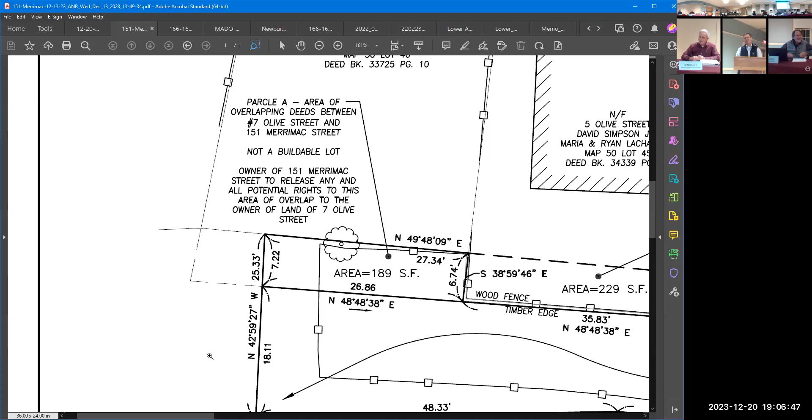Potentially, but that is a different owner. Most likely the owners, it'll never come up. So probably you'll never see it. No, it could be another overlapping piece. Yes, it is another overlap in the deed descriptions, so, yeah.

And then the other question I have is, when you're looking at the building on 151 Merrimac, the hatching doesn't go all the way around the building. Is there a reason for that, or you just ran out of ink, or?

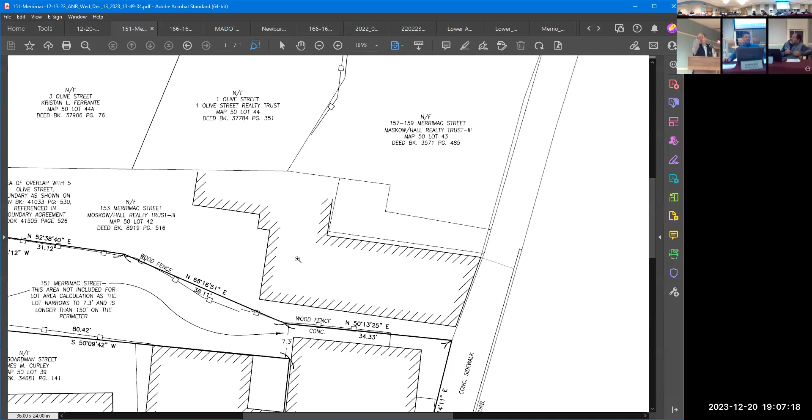The hatch, am I missing? Oh, this one, right there. Oh, that's the abutting building. That's not 151 Merrimac. 151 Merrimac Street is the corner lot. Oh yes, okay, I see.

So it's a very confusing plan, there's a lot going on. There was even more going on as we tried to pull it all together to make it legible. We typically show only 2 properties when there's a portion being swapped between one property and another. In a situation like this, it's usually pretty straightforward and you can see more clearly. Yeah, this one has a weird piece that goes to the back, and that's where it happens, and then you have these zigzags between the discrepancies, so it makes it that much more confusing. Yeah, which is why I came to help explain.

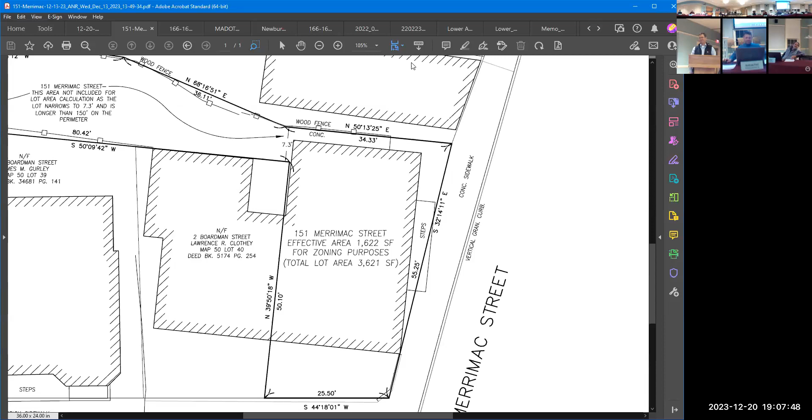I wouldn't have asked the questions if you weren't here, so.

Okay, is there a motion from the board? I'll move to endorse the ANR plan for 151 Merrimac. Is there a second? Second. Okay, all those in favor? Aye. Any opposed? All set, thank you very much.

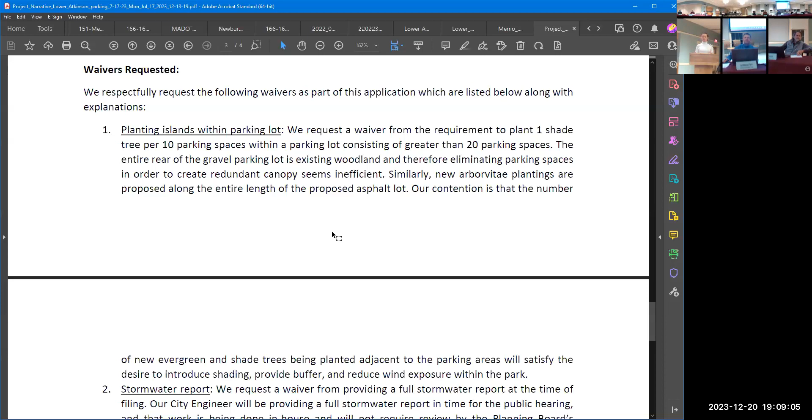So the 5 waiver requests are: number 1, a stormwater report. We request a waiver from providing a full stormwater report. The reason being that it's the city engineer who's actually working on the stormwater plan for this and would also be the one doing the consulting. We wouldn't be hiring an outside consultant, he'd be consulting the same project. We'll get into details about the stormwater management plan he's provided. We have Diane Gagnon from the city here who worked on the design as well. In a nutshell, we're providing 15 times more stormwater holding capacity than previously exists on the site. He feels confident that any stormwater overages will be dealt with on site.

The second waiver is for a traffic study. We've been speaking with our DPS director about this, and his contention is that we're not actually increasing the traffic volume to the site by doing this work. It's strictly a project to improve traffic safety by eliminating cars from backing out onto Merrimac Street. There's no aspect of the plan you're seeing tonight that's going to increase the volume of traffic to the park.

The third waiver is for the surface and groundwater report. We do include some narrative or information about that, but we are asking for a waiver from doing an actual surface and groundwater study. We did a test pit. There's data provided of what we would expect to find at the site in a situation like this, but there's not a whole detailed report. There's sufficient information for the stormwater design, basically, is what is being presented.

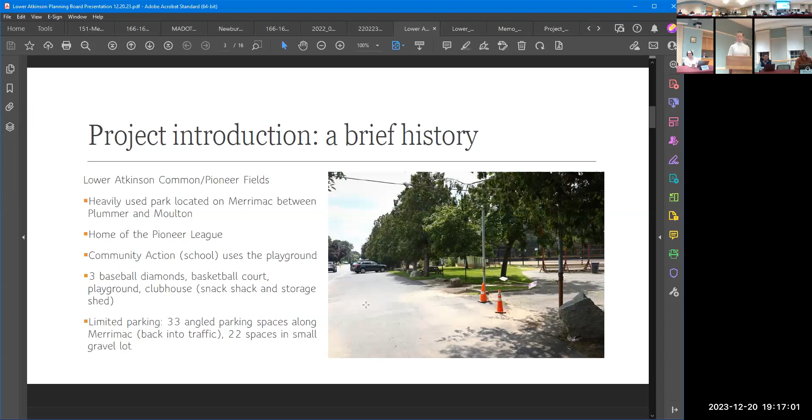Next slide, please. So to give you a brief history of how this project came to be, in 2020 the Parks Commission worked on a master plan for the park, and they had 5 primary goals for the master plan. The first was to relocate an aging playground that's currently located on Merrimac Street.

Towards the center portion of the park, the reason for relocating it is it would free up the space along Merrimac to bring the parking into the park. That playground will be a universally accessible playground, so it will benefit and support the needs of children of all abilities.

The second main reason for the master plan was to alleviate drainage problems. As you can imagine, with the exception of the slope between Lower Atkinson and Upper Atkinson, the fields themselves are very flat, and there are puddling and other drainage issues at the park which we wish to remedy, which Diane will go into detail on in a little bit.

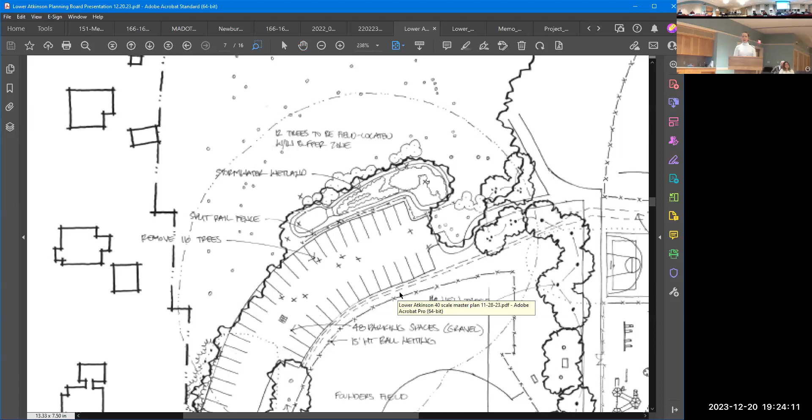Besides those 16, there are 2 other additional trees that we're removing at the front of the park near the clubhouse. One is a Norway maple that is in severe decline, located right there, and as well an ash tree on the corner of the clubhouse. This is an ash compromised due to emerald ash borer.

The flare of the tree is actually lifting the asphalt there, and it's creating some drainage problems. You can actually see the line of water as we have heavy storms that enters into the clubhouse.

We are also removing and replacing the row of arborvitae to the east of the clubhouse where the asphalt parking lot is going to be installed, so that the arborvitae just get pushed back closer to Founder's Field, keeping a buffer between the park and the road.

We've also added 5 arborvitae towards the closest neighbor, up from the Community Action School, since that neighbor will be the most impacted by this change. And again, from a landscape perspective, we're adding a large number of native wetland plants and native understory shrubs behind the gravel parking lot within that stormwater wetland, which I'll get into greater detail in a moment.

I'm going to turn it over to Diane to talk about the traffic at this point. Diane Gavin, assistant engineer for the city.

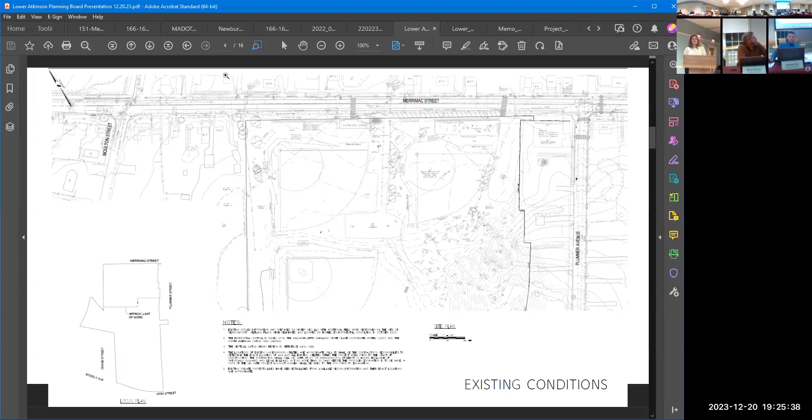Andy, would you mind going back to the existing condition plan? Kim has touched on a lot of the design that we came up with to address the safety concerns in the area. One of the major issues here was concerns for residents, both pedestrians, bikers, and drivers in this area.

So as part of this project, we have designated this zone as a safety zone. This entire length from Plummer Avenue to Moulton Street will be designated a 20-mile-per-hour zone, and that is something that we have received an ordinance for. There will be signs placed sporadically along this road indicating that this will be a safety zone, 20 miles per hour, and we are also including no parking along this entire stretch.

As you can see on this existing conditions plan, over by Plummer, we have a crosswalk just beyond Plummer, so that'll be kind of where it ends. And then it extends all the way over to Moulton Street, and just past Moulton Street, right across the frontage on the other side, that will also be the extent of the safety zone.

I know it's not on this plan, but we are proposing a sidewalk for this entire length as well. Currently there's one on the northern side of Merrimac, but we will be installing a sidewalk from Moulton Street all the way to Plummer Avenue. Currently there is no sidewalk on the park side, so we will be doing that as part of this project.

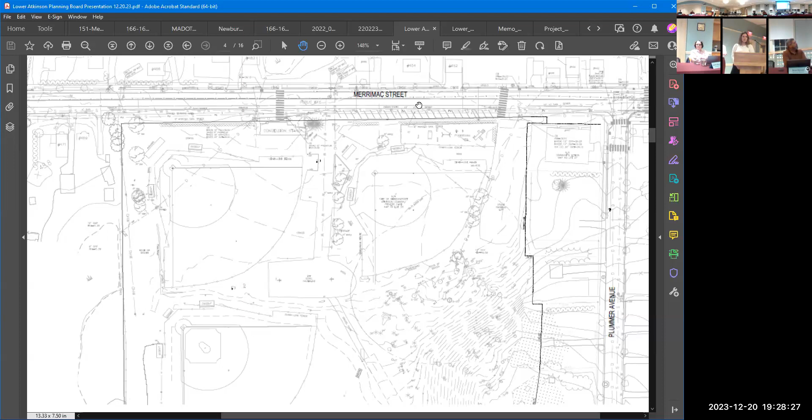I think we can probably go back to the original. So Kim has already talked about a lot of the design and the measures we've taken to make this safer for park goers, our ball players, anyone interested in using the park.

We have pulled all of the parking off of the street. One of the major issues here was cars backing out onto Merrimac Street, which is a very busy road, especially during the hours when ball players are there, after school, in the evenings, when commuters are going back and forth. So we've pulled all the parking from Merrimac and closed that off by eliminating parking on the west side. That will just be a drop-off zone and a place for a bus to park if necessary.

The rest of the traffic will enter the one-way next to the concession stand. They can either pull off and do a drop-off there or park in that parking area. There are 22 spots there, and if those are full up, drivers can proceed to the gravel lot. As Kim mentioned, we are increasing that by 20 spots overall. So does that have 48 spots back there?

It's very visible, so if you don't have parking out front, it's clear there's a huge lot back there. One thing to remember is all these ball players are consistently going there. If you're on a team, you're there for 2 or 3 practices a week, plus games year after year. So we're not really concerned with people not knowing that gravel lot exists. If there's a backup on Merrimac to get into the paved lot, I'd say the majority of people know to go past that and into the gravel lot behind.

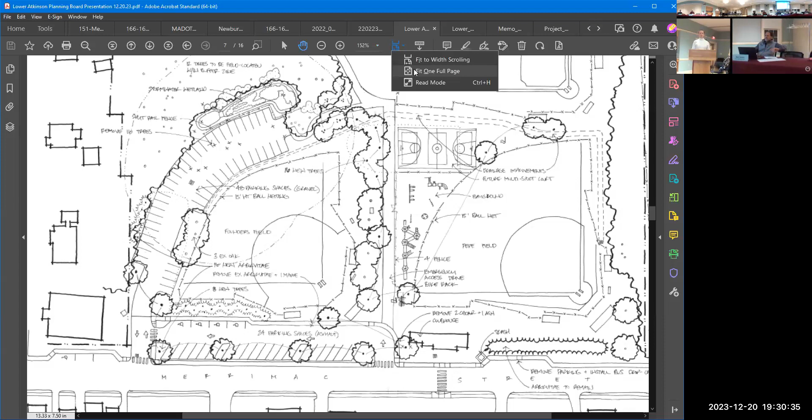If you want to go 2 slides forward — next one, sorry. So we did a little study of the cars that are parked there during the season when baseball is in session. Again, the existing number of parking spaces at the park currently is 55, and we want to increase that.

The answer is yes, with the exception of one hour between 4:30 p.m. and 5:30 p.m. Between 4:30 and 5 p.m., the overage of cars is about 4. Those people would likely find a spot on Plummer or go up to the parking lot off of Christopher Street, which is also on Atkinson Common. They could park in that small lot there.

Between 5 and 5:30, there's an overage of approximately 22 cars. Even with a full expanded gravel lot, there's probably no way we'd be able to accommodate an additional 22 cars in the park. So there will just be a 30-minute period when some cars will have to park on the street. But overall, we'll be able to accommodate parking with this plan for every other 30-minute increment during any given evening during baseball season, which is when the park has the heaviest number of vehicles. Next slide, please.

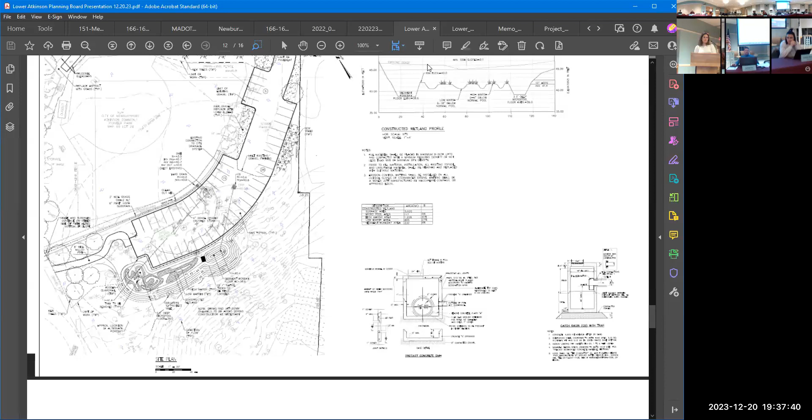And on the western end, from a high point there, we're going to replicate what's happening today—rebuild the swale that's out there and include an under drain to capture any extra water we possibly can, and replace the structure that's out there so it continues doing what it's doing today. As far as the proposed parking lot, we will have a couple of catch basins, one at the entrance and one towards the exit of the paved parking lot, and water will be directed to either one of those catch basins and outlet as it's doing today into the street drainage system.

The total area we looked at here is about 30,000 square feet, and that area included anything that was altered—existing pavement, grassed areas, gravel areas, mulched areas, anything that was altered. To compare the actual increase of impervious area, we found it to be approximately 4,000 square feet. So there's a net increase in impervious area of about 4,000 square feet.

That's equivalent to what happens with a single family home, and that's something the state and the city of Newburyport dismiss—we don't need to do a study for that, it's a very insignificant amount. But we feel this increase in impervious area is compensated for by the large stormwater system we have out back, which will be catching more than the flow we have now—about 15 times the amount currently there. So we're going from about 200 square feet to up to about 3,000 square feet of storage that will both store the water and treat it before it enters our system.

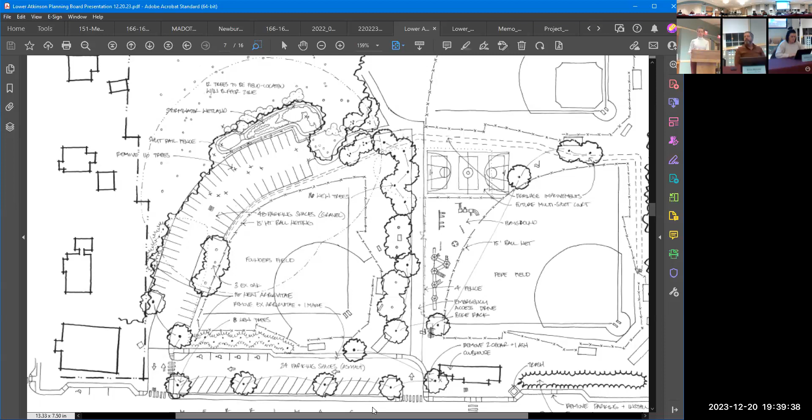You want to go to comments? We're almost done here.

Scroll forward to the blow up of the stormwater wetland, one more slide. Right there. So we actually had our public hearing with the Conservation Commission last night to review the details of the stormwater wetland and the plantings. They have kept their public hearing open, but they wanted me to reiterate to you tonight that they didn't have any further comments or questions. They just wanted to make sure you didn't have any additional changes before they closed out that public hearing. But in terms of the environmental impact, which we talked about last night...

Per what Diane just said, we feel that we're improving the ecosystem here with this stormwater wetland. We're removing invasive species and planting native vegetation that will provide both on-site water quality treatment and support wildlife, selecting plants that are fruiting and have habitat qualities, things like winterberry, summer sweet, and blue flag iris - native plants conducive to this type of wetland area. We're also vastly increasing the number of canopy trees overall in the park.

So within the 100-foot buffer zone, which is jurisdiction of the Conservation Commission, we are removing 16 trees and planting 16 trees. The park as a whole, we're removing 18, so 2 additional to what's inside the wetland buffer, by the clubhouse. So 18 trees being removed and 36 trees being proposed - that's a 2-to-1 ratio park wide, and 1-to-1 within the buffer zone of the wetland.

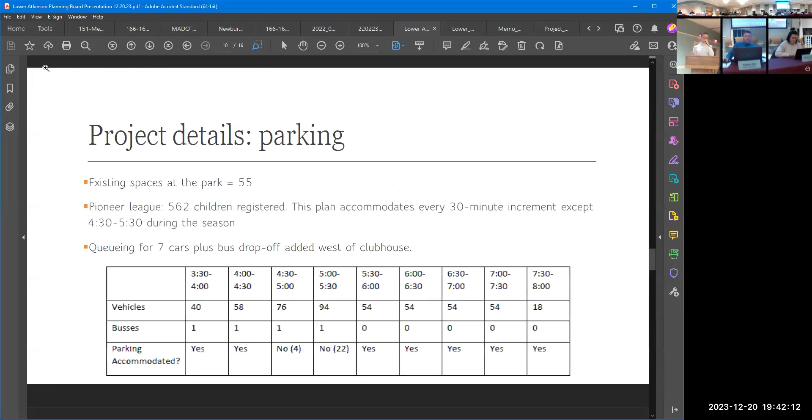If you want to go back to the full plan, Andy. The reason why we reduced the number of parking spaces along Merrimac Street was a couple of reasons. We wanted to improve the vehicular movements here, but we also wanted to provide some on-street canopy. So as you can see, there are 4 canopy trees along Merrimac Street. We removed 2 parking spaces in order to accommodate those planting islands, and that was something we had heard from someone who commented during the site walk.

We swapped the angled parking spaces along Merrimac Street from the park side to the street side. The reason for this was so that parents dropping off their children could drop them off on the park side of the asphalt lot, so they weren't crossing over the asphalt lot to get into the park. This allowed us to have an ample queuing area for 7 cars.

We moved the 4 handicap accessible parking spaces a little further into the park so that the drive aisle would not be impeded by anyone parking in those handicap accessible spaces. We also added that bus drop off to the west of the clubhouse, which we talked about - again, no trees are being removed for that.

We extended the drainage swales, not just behind Founder's Field, but across the main aisle of the center part of the park and between Hawks and Pepe Fields, wrapping around the side of Pepe Field - improving the drainage overall of the park. And again, we vastly increased the number of proposed trees, 18 to be removed and 36 to be replanted. That's what I have for you tonight, if there are any questions. Thank you.

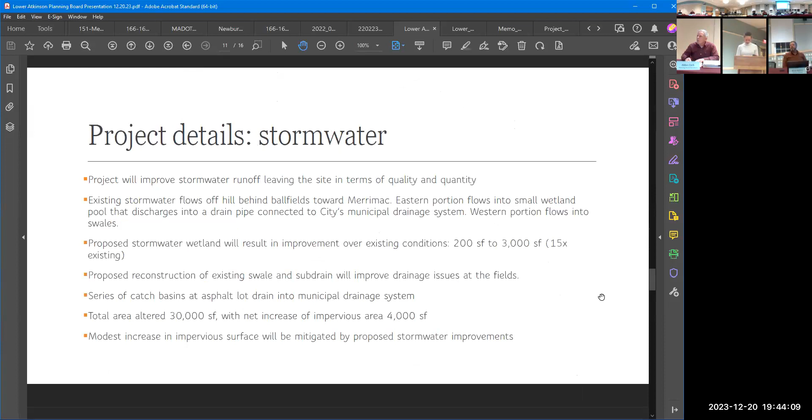There are 12 smaller trees going within the wetland buffer that will be field located. That's a pretty heavily wooded site, so we want to do the work first and then find out where the spaces are to plant the trees. Those will be smaller, 1.5 to 2 inch caliper, so they can accommodate the size of the area we have to plant. The larger trees in the center part of the park will be more like 2.5 inch caliper, so decent sized trees.

And the ones along Merrimac Street? 2.5 inch caliper, yes.

I was trying to figure out, it was hard to see exactly on the plan, but are there trees by the asphalt, not the gravel lot? Those are largely existing, the ones in that island. So all the trees with an open circle in the middle are existing, and the closed circle are proposed.

So the 3 large oaks midway down Founder's Field, those are existing to be protected. We're actually moving the gravel a little further away from the crown of those trees to try to protect them a little better.

Okay, that's what I thought. And the other new trees are in the area between the two fields? So if you want to scroll up a little bit, there's 2 additional oaks right at the entrance to the gravel lot, then the 4 along Merrimac Street.

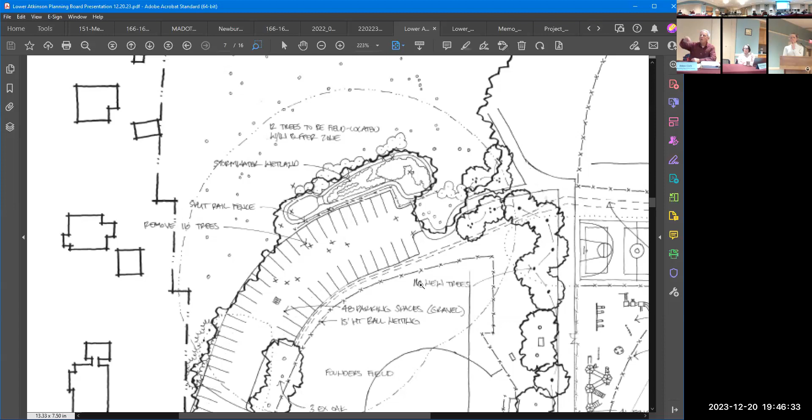Another question - there's an existing chain link fence around the field to the west of the new playground location? Yes, and that's going to stay, with a 15-foot ball net.

There's fencing around the playground that will be installed, a low 4-foot fence. And then the fencing along the outfield will remain, but there's going to be 15-foot ball netting that can be taken down in the wintertime, but it will be up when there are players there.

And as far as the expanded gravel lot, is there any markings for the parking spaces, or are we just assuming they're going to treat it much the same as Cherry Hill, where they stripe it every year or so? Yes. I was wondering if we were going to look into that, whether they'd really be able to count on those parking spaces. At Cherry Hill, they do sort of spray them out, I think, at the beginning of every season.

Thank you. Jamie, just a couple questions about the user experience. Are you anticipating a budget for signage for wayfinding? Because I think the big improvement in this plan is the drop off area. Are you thinking about some signs to help reinforce your plan? And last, related - you said no parking along Merrimac Street. Have you thought about no stopping as well, perhaps to further enforce people using the drop off area?

So on the proposed plan, which we have submitted - it's just not on this presentation - we do have quite a few signs out on Merrimac Street stating both the safety zone and that there will be no parking along this stretch of road. Into the actual parking lot, we will have no parking where that drop-off zone is, and it will state that this is a drop-off zone only, on both the east and west side. So we will have all that signage, and we do plan for that.

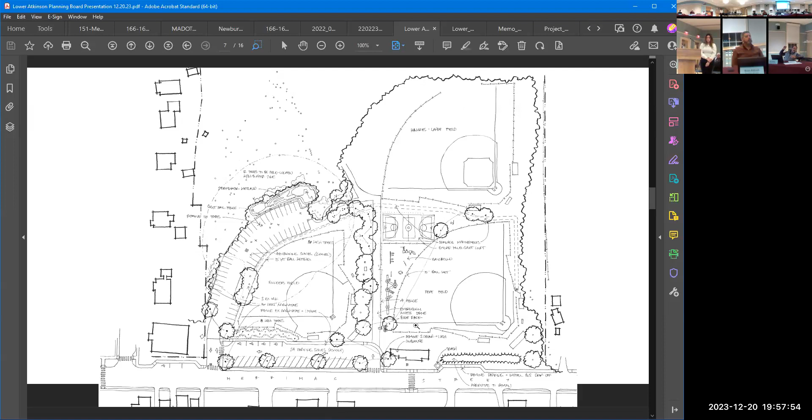On the wetland plan, there is something identified as a micro pool. Is that the same as what you were describing as the forebay?

The sediment forebay is where the water comes in first, where the catch basin empties into, and that will allow the sediment to settle, and that can be cleaned out periodically, and then the clean water will overflow into the wetland itself. The micro pool is just part of the design, almost like a second sediment basin where the water just sits, and as that fills up, it enters the pipe and out into the system out there. So that's just part of the design, because there's low marsh, high marsh, and then we have this micro pool to catch all the water.

Thank you. Are there any other questions? I guess we could open up the public hearing then. Is anybody here? We don't actually have anybody in this room. Well, we may remotely.

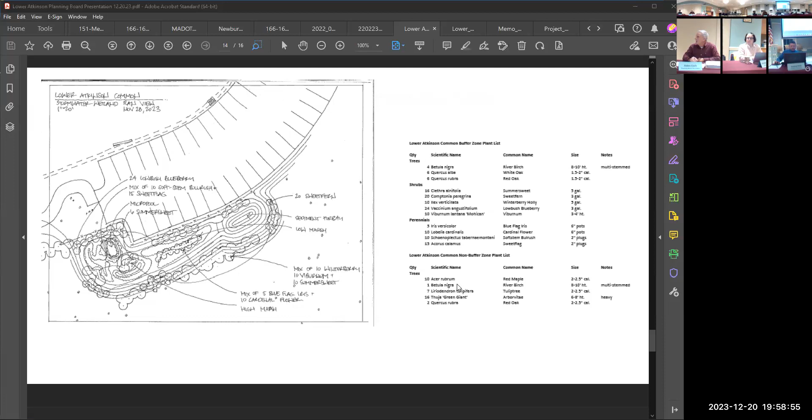You have one. Strange, but not, here we go. So we have Jen and John Blyler. Would you like to address the board? Jen and John, can you hear us? You may need to unmute on your end. It looks like you're unmuted from our end, so you should be getting audio if you are speaking.

I'll give a moment on that. Christine Wallace? Councilor Wallace, yes, can you hear me? We can, thank you. Can you hear me? I'm not sure I can hear you. We can, can you hear us?

Okay, excellent. All right, thank you everyone for the presentation. It's exciting to see this coming to fruition. It's been many years, and with the main goal of getting the parking off of the street and internal to the park where it's protected. It's just exciting to see that happening. I just have a few comments, so bear with me here.

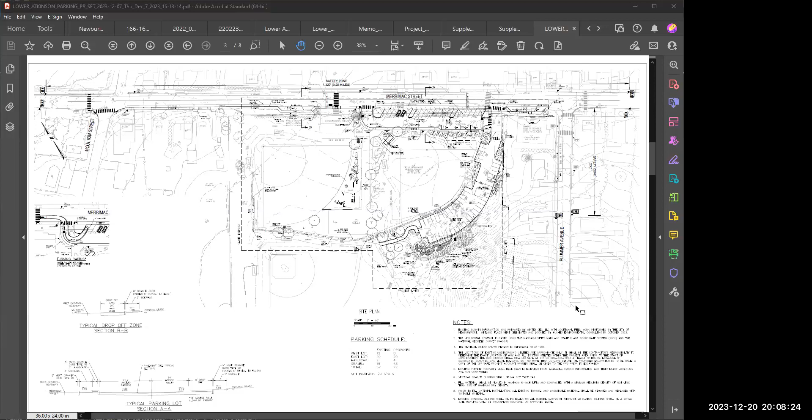I just wanted to say I wholeheartedly agree with Councillor Wallace, and thank her for her years of work on safety along Merrimac and in service to the city council. I think this is a good step toward addressing a lot of those concerns. I also agree we should encourage and enable more pedestrian and bike use, but I would remind folks that a lot of the use of the park as it relates to Pioneer League and the softball team are people from out of town, so we're limited in our ability to influence that.

I also want to thank the special project manager, the Conservation Commission, and the Planning Board for helping to bring in a healthy amount of public comment in this process. We've taken our time, and it appears we're incorporating that into the designs in this latest iteration. I won't attempt to comment on the expert opinions of the director of DPS, the city engineer, and others who've weighed in on drainage and traffic concerns, but we do have their voices incorporated in memos. I think creating this amount of parking off the street and reducing traffic is a good step in the right direction for residents, families, and kids using the park. It's not the end of the work we need to do, but I think this is a good compromise. Thank you.

Okay, public hearing is closed. We'll now move on to motion.

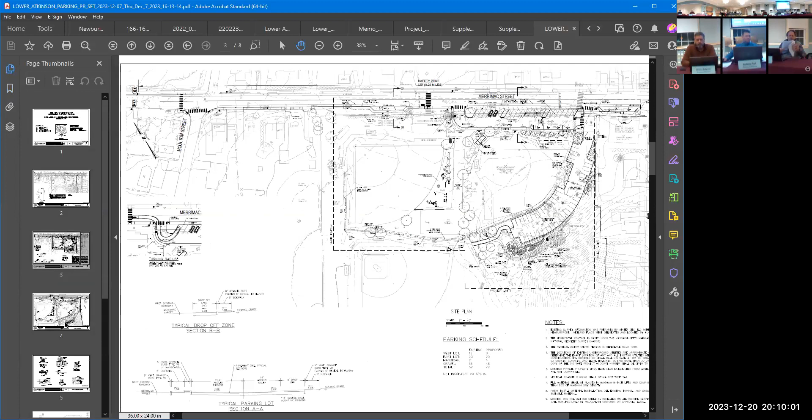We have, well first of all, we have two - the staff memo only referenced one vote at this point, but we actually have two votes that we need to take. One vote is, if we wish, to grant the waiver for the tree requirement in the parking lot. I've drafted a motion, and I'll read it, but if somebody wants more discussion before we move on to that motion, we can.

This is the motion I was going to put before the vote on the plan: Motion to approve a waiver from the requirements in section XB-HD4 to provide one tree per 10 parking spaces and to maintain at least 5% of the parking area as landscaping, including trees and landscape islands, with no more than 20 parking spaces between each island. As Alden was talking about in the plan, we have that group of 3 oaks. If we were to do a standard parking lot design, we'd need one oak in one island and another oak in another island to separate the rows into fewer than 20 spaces. So the point of the waiver is to come up with the same amount of trees and landscaping, but without breaking it into fewer than 20 spaces between landscaped islands. That's the additional motion not in the staff report. I'll open up for discussion now, unless anybody wants to make a motion first.

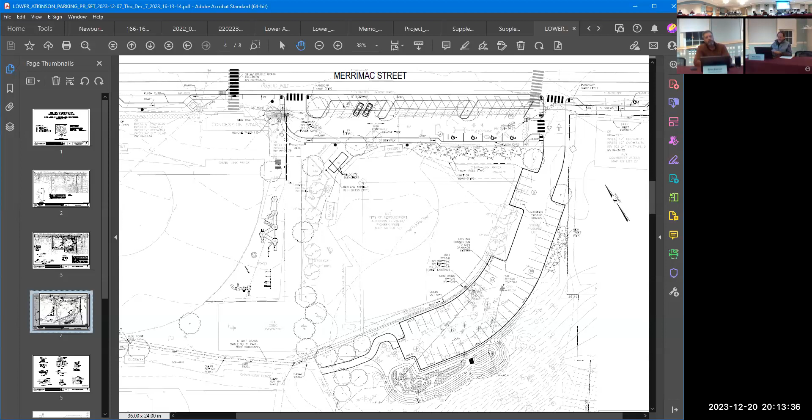Okay, moving on. Request for minor modification at 166 Route 1. With the chair's permission, I'll present this briefly. I had discussed with Minco whether they actually need to be here this evening. I didn't feel that was necessary. I think I can summarize pretty briefly.

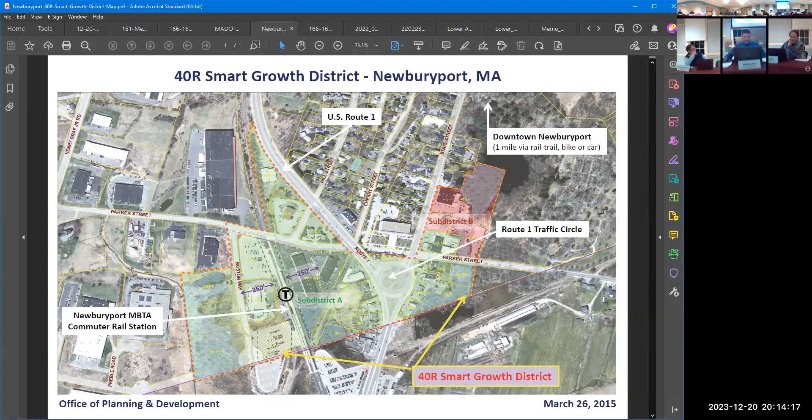In essence, what has been requested here is that the planning board and the applicant had agreed to a series of improvements, typical, just like the last application you looked at. We try to make sidewalk connections as best as possible, path connections, things like that. What happened here was we had two things: one was a deceleration lane, and the other piece was a sidewalk along the frontage.

In talking with Mass DOT about those improvements, Mass DOT wanted to make sure that the fee and interest for that new public access, essentially quasi-public access at that point, would be transferred to Mass DOT, so it would then be part of the state right-of-way with that sidewalk access. I think they wanted to make sure that was locked in on their end as well for that public access.

So in essence, because that was actually part of the lot area, Minco is not expressing opposition to this to Mass DOT, but rather has returned to the planning board just asking if a minor adjustment can be made to the calculation of the lot area for this particular project. That is something the board can do. This actually is still within the 40 units per acre allowed under the ordinance — I think it goes from 38 to 39 units per acre.

In essence, with a slight reduction of about 5,000 square feet, it creates the exact same plan you had previously approved, but mechanically accomplishes that by satisfying Mass DOT's request for this frontage strip to be transferred to them, and that is shown. It's a little hard to see in this drawing because it's so long, but the building is in this area.

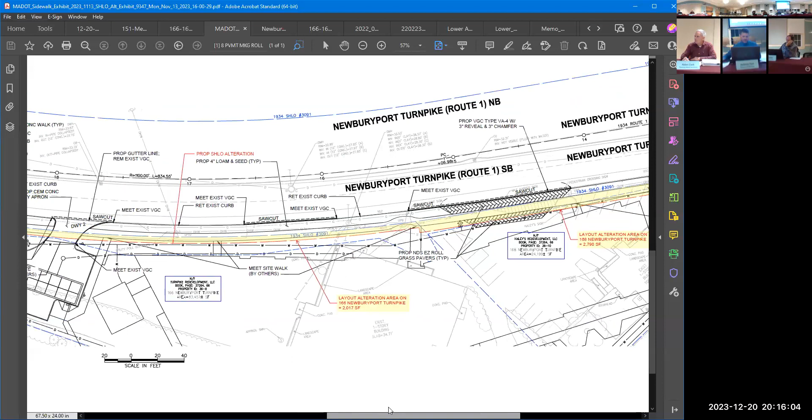And this strip right here, essentially on the frontage, is where that sidewalk goes. They're asking for that right-of-way line to be adjusted to accommodate those improvements. This little notation right here is just about some grass paver support — basically plastic grids they install in that grass section because it's providing emergency access for personnel, per the plan the planning board approved at this location near the building. So the grass here would have extra support underneath it essentially.

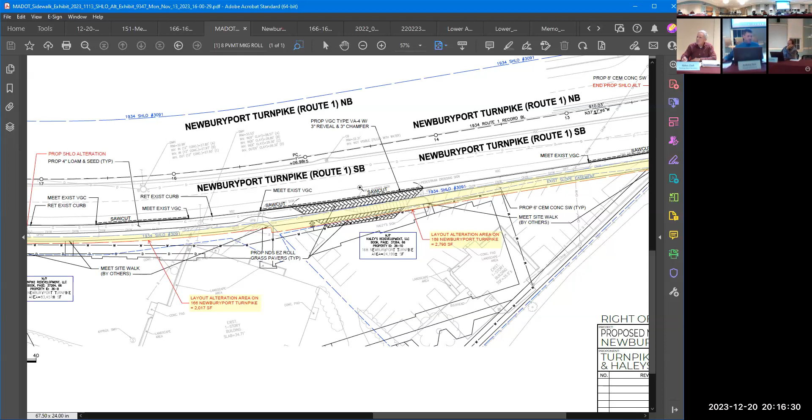But that's all this plan is for. It doesn't change ultimately the improvements the planning board wanted, and therefore the office doesn't object to the change and recommends approval of the modification as consistent with that. If it had resulted in physical changes to the plan, we'd be more concerned, or if it was later given to some other party instead of the state for that same public access, we might have concerns. But in this instance, it seems to make sense and be entirely consistent with what the planning board had wanted to accomplish through the improvements the applicant was proposing at that time. So we recommend approval of the minor modification.

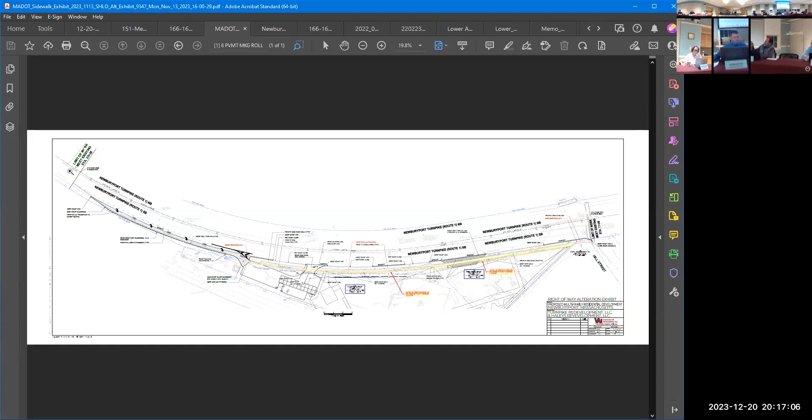I had a question on the left-hand side of the yellow stripe. Oh, sure, yeah. Is that what we actually approved — the sidewalk kind of ending and then taking a right angle turn into the parking area? Let me take a look at... oh, I just didn't notice it until tonight. That's great. So this is our... oh yes, there it is, right there. Yep, it is, okay. It's interesting.

Yeah, I would certainly expect, as with any other phasing, what we'd be advocating for any future connections, section by section if necessary.

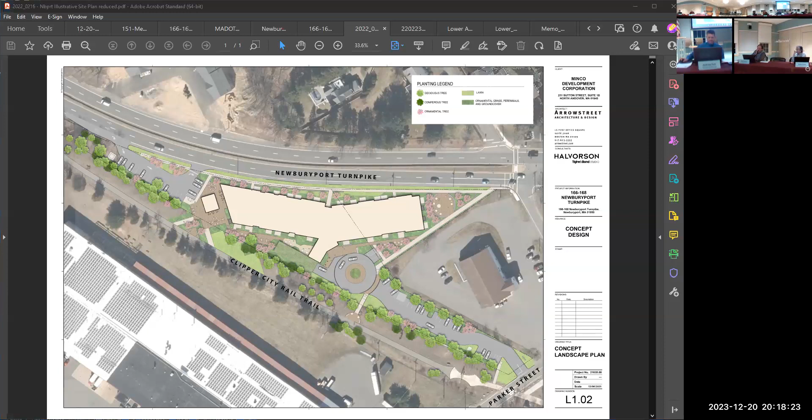And what is that on this plan we're looking at, go back to the other plan? Is that those drainage chambers shown, the rectangles where it says meet site walk by others? Oh yes, this is underground, that's a drainage plan. Yeah, that's the underground infiltration tanks.

They're not labeled, but that's what that is. Okay, does anybody else have any questions about this?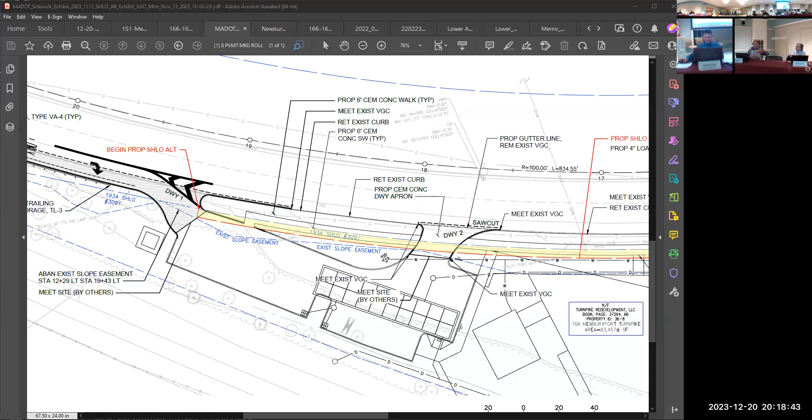So then the motion would be to, I'll move to consider the request for minor modification and to approve it. Is there a second? Okay, any discussion? All in favor? Any opposed? Okay, great, that passes.

Okay, we are on to approval of minutes. I submitted some comments and edits on both the November 15th and the December 6th minutes. I don't know, maybe, Bob probably submitted some to you as well. If anybody has any additional comments or changes to make, and is there anybody who needs to not vote because they weren't here during those meetings?

Who's here? Great, okay, so I would accept a motion to approve both the November 15th and the December 6th minutes. I'll move to approve both sets of minutes. Is there a second? Okay, thank you. All those in favor? Any opposed? Okay, great.

Anything to talk about zoning tonight? I don't think so, not more for the rest of the membership. Rick and I have been talking a lot, obviously a lot more detail, about some of the zoning changes we're bringing forward, but we'll be circling back with you for some materials.

I would definitely say, as I mentioned before, take a look at the 40R smart growth district, and think about things you like or don't like, or have questions about in that zoning district. All the text is online on our Muni Code page that we refer to, and there's the map of the district too. If there's any questions you have, let me know, but think about that district and think about applying something very akin to that to the Story Avenue area.